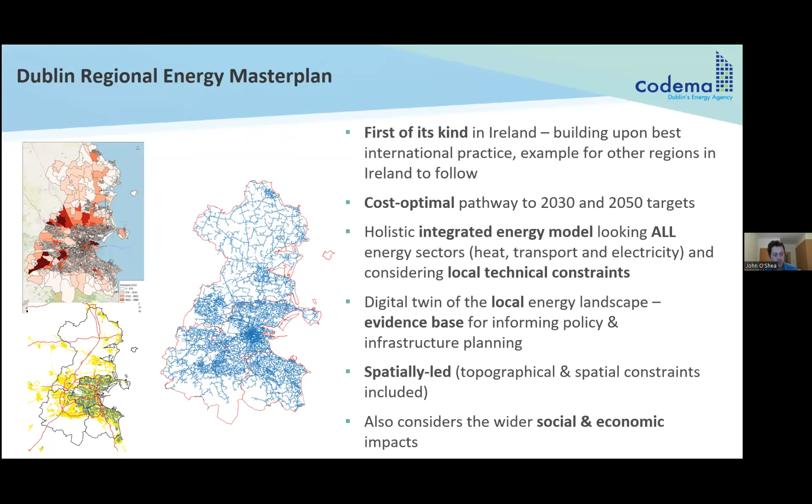And we also consider the wider social and economic impacts as well. So things like employment opportunities, health, fuel poverty, and affordability. So we've got a section on that as well in our work.

Just to chat about where it fits into policy at the national, regional, and local level. At the national level, this allows us to chart the greenhouse gas impact of the plan and assess how we might progress towards our plans, and also outlines the contributions that could be made by certain regions to national targets. So we've got national targets for number of heat pumps. We can say Dublin can contribute X number of heat pumps to that plan. Or for the national target for district heating, Dublin can contribute X terawatt hours to that plan.

And then at a regional level, it's a response to a number of regional policy objectives. So things like feasibility for district heating, identifying sustainable energy zones for large scale renewables. And then at the local level, as I said, it's used as an evidence base for things like our climate change action plans, informing county development plans, identifying decarbonisation zones, which the local authorities have to identify as part of their remit. It's also an online data source that can help support sustainable energy communities in their own more local master plans.

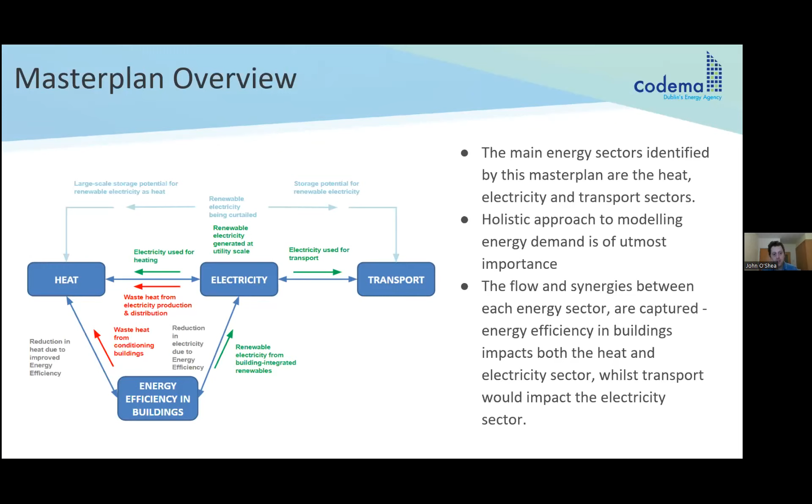And also things like, if you improve the energy efficiency of buildings, how does that impact the heat demand, or will it also create more opportunity for waste heat to be used through the cooling system. So it's trying to model all these different interactions.

So the process then, I won't go into a lot of detail on this, but just to give an overview. So the modeling process is basically, we started with a current situation, so what exists now, and then projected a business as usual case, which is basically taking the current situation and projecting it into the future, for things like increases in population, upcoming building standards, things like that. And then identifying the potentials based around the local constraints. So the local constraints for each technology, and then using that to inform our optimized pathway to achieve our targets.

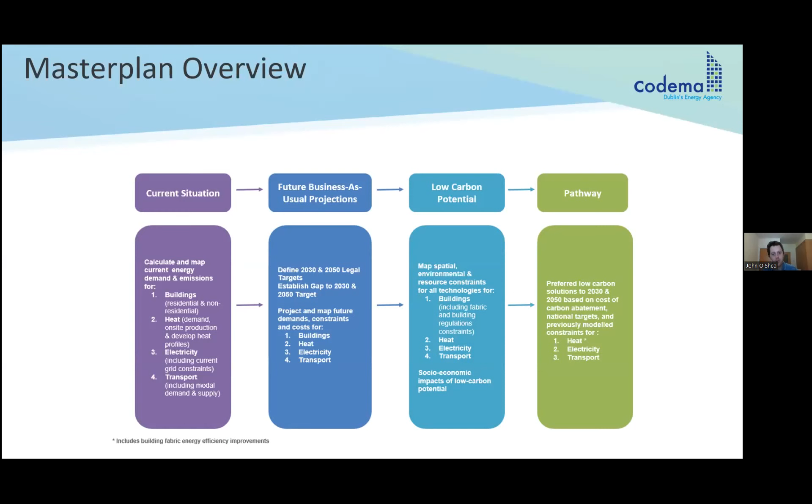I think it's important to say as well that one of the main motivations around how we address the master plan is that we didn't want it to be a report just gathering dust on a bookshelf. So we wanted it to be interactive and open for use and interrogation by others. So to do that, we prioritized the use of open source tools. So a lot of the work that we've done has been done in Python, where the code is available online on our GitHub repository, where other regions can use and avail of that resource.

We have a lot of online resources and maps, which the general public can look at and say, oh, my neighborhood seems to be suitable for this certain technology. So increasing engagement in that way, and then also making the data we have available for other research groups in academia, so that, like, we've done a lot of pre-processing of data in the master plan. So we've done all this work, so we want to make sure that others don't have to go through that same step, so they can start their research from the point of doing the research rather than the point of gathering data and cleaning data, which is always a significant amount of time for anyone who's worked in the area. They know that well.

And then also we're already starting to use the master plan to inform local policy. So that's our plan, that it will continue to be used by local authorities, etc., to help inform their local policies. I think it's worth mentioning as well that we collaborated with a lot of different organizations in putting this together. The 4 Dublin local authorities, we've got a residential energy modeling group that we're part of as well, that helped input into some of our models, engaged with ESB, the NTA and all these groups to help inform this. So it's trying to bring all those strands together into one path.

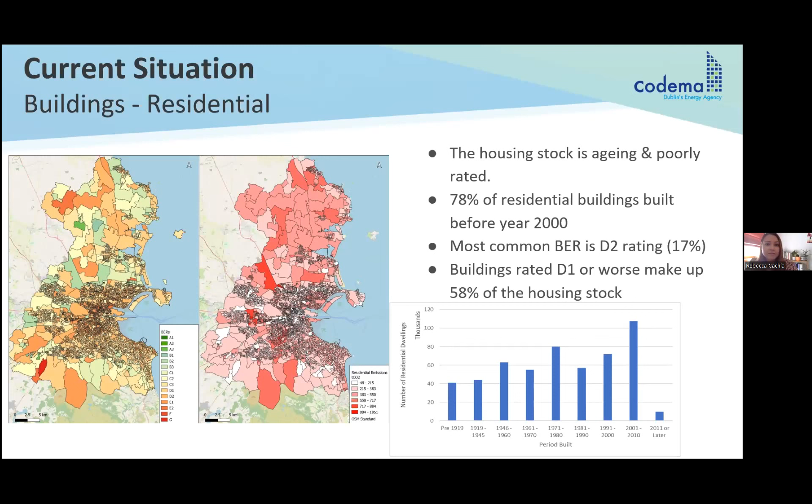Thanks, John. So the non-domestic sector includes commercial, so that's the likes of retail, offices, restaurants, all the public sector buildings and industrial buildings, excluding ETS buildings. In this project, we've analyzed over 30,000 commercial properties, and the total energy demand from non-domestic buildings is coming from commercial buildings and services. They make up 65% of the demand, followed by the public sector and industrial uses.

For the public sector, we've made use of metered energy consumption. This is all data that's coming from the monitoring and reporting through the SEAI's tool. From this, we could find that healthcare buildings emitted the most CO2, followed by education buildings, offices and other buildings. For commercial buildings, we made use of benchmarks, so that's really using an energy use per meter squared floor area.

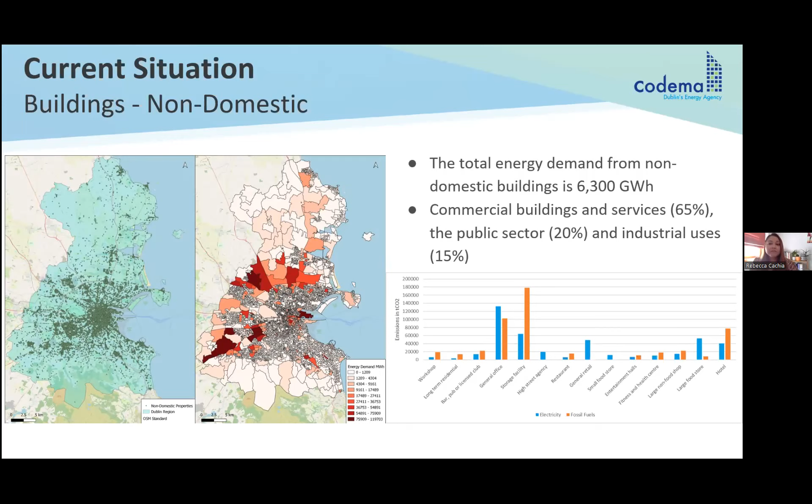And it was found that storage facilities were emitting the most emissions, so that's the likes of warehouses and bulk stores used for retail, offices, and leisure categories. And then for industrial emissions, we made use of industrial annual emission reports from the EPA. This provides us with metered energy demand for large scale energy buildings. Next slide there, John.

Thanks, Rebecca. So the current situation in heat: the total heat demand in Dublin is just over 10 terawatt hours. On the right-hand side there, we've provided a breakdown of where that heat's coming from. It's predominantly natural gas, followed by electricity, mainly direct electricity rather than heat pumps, and then oil coming in third. And you can see with the electricity that predominantly that's in the Dublin city area.

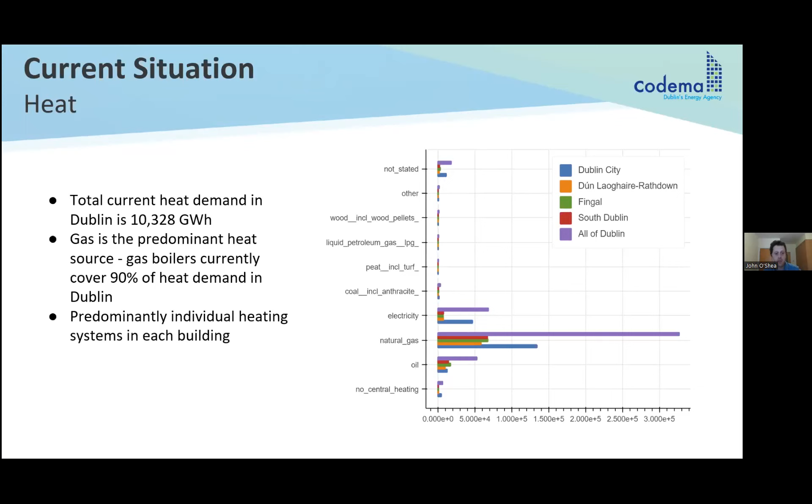That's due to the fact that there's a lot of apartment blocks that would have direct electric heating as opposed to homes. So gas is the predominant source for heating in the Dublin area, and it covers about 70% of the installations, but about 90% of the heat demand. It's worth saying that the heating systems in Dublin are predominantly individual heating systems that heat each individual building.

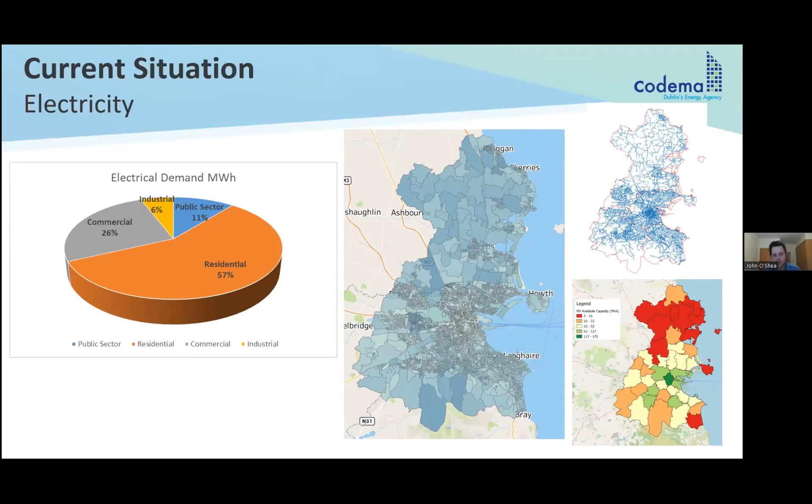Just on the electricity side, you can see the breakdown of electricity demand. It's predominantly in the residential sector with 57%, then commercial, followed by public sector and industrial. On the maps on the right-hand side, we've mapped out essentially the electricity grid for Dublin, and put together, down the bottom right, this capacity map, which shows constraints on the electricity grid, and we go into what that's used for in later slides. Over to you.

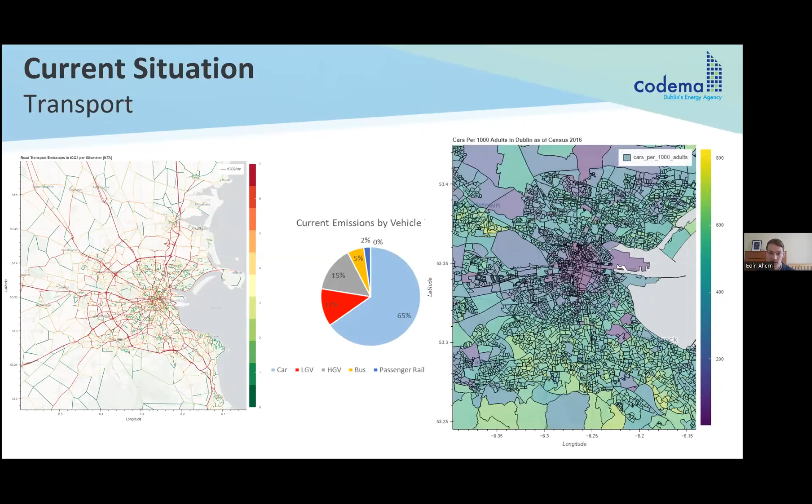Then looking at transport, the emission share for the Dublin region is slightly lower than the national share. And this can be due to the high density of developments, meaning that in the Dublin region there are shorter distances to be traveled, as well as access to higher quality public transport, walking and cycling facilities when comparing to the rest of Ireland, that is.

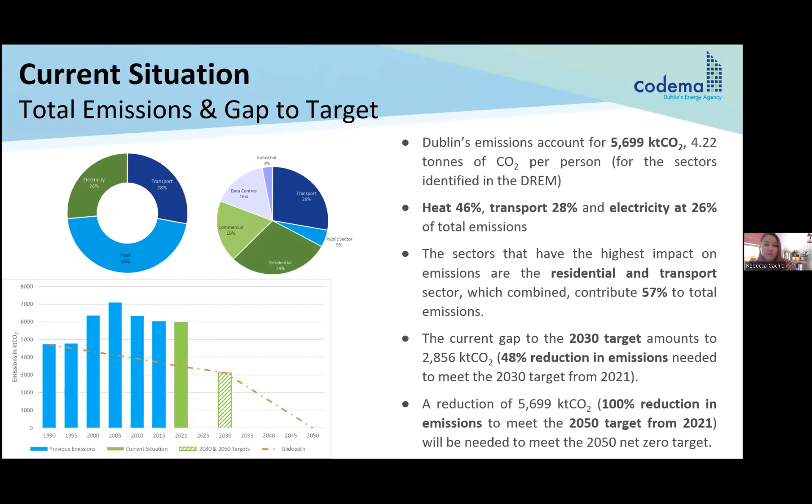So then moving on to our challenges and barriers and getting a sense of what the key issues are to meeting the Dublin region's targets in 2030 and 2050. So for the building sector, the barriers to building upgrades can be attributed to a number of different issues, and most of these barriers are common to both residential and non-domestic buildings. So from Codema's Zero Together survey, participants highlighted barriers such as cost, poor infrastructure, and also lack of information and awareness as being key barriers to those living in Dublin to take direct action.

We've also taken into account in the master plan consumer behavior and consumption practices. So looking at cost and long payback periods for retrofits, it makes it difficult for customers to buy in essentially into upgrading their buildings. And this is even more so when you take into consideration consumer behaviors and consumption practices.

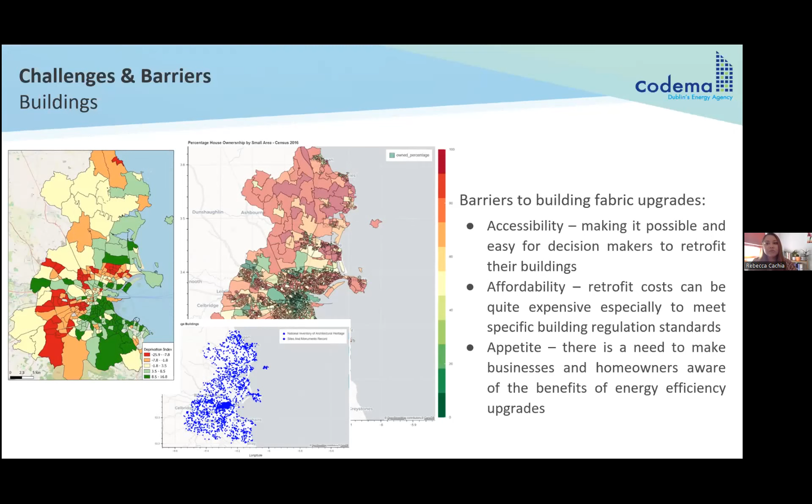Next slide there, John, please.

So one of the key questions was where to start, which areas to tackle first, and how to alleviate the issue of energy poverty in specific areas. So to assess energy poverty and to identify these areas that are in need of retrofit upgrades, we've combined together BERs. So we've looked at BERs with a rating of D1 or worse. We've combined that with high unemployment, so unemployment of greater than 20%, and a deprivation index of less than -10. So that would mean it's a disadvantaged area.

And from this, we can identify the energy poor areas. So it's identifying these areas which we should tackle first, which we should prioritize for incentives. And we have this tool online as well on our master plan website. So we'll share all the links then at the end of the slides.

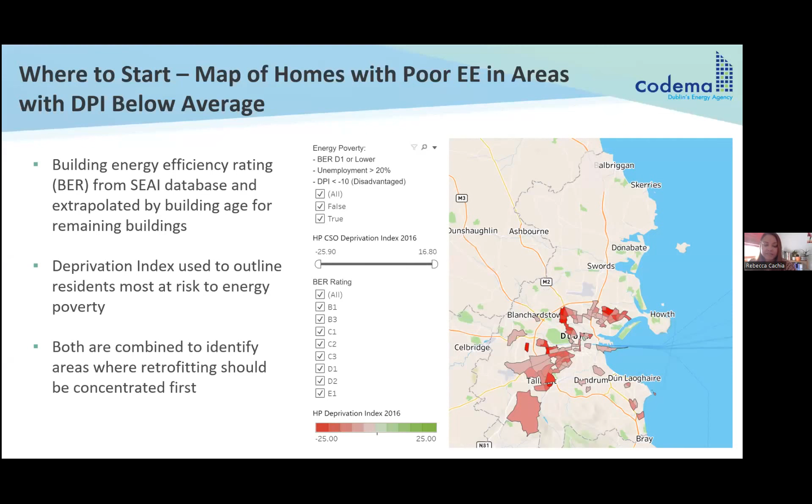Next slide there, John, please.

Thanks, Rebecca. Yeah, just to chat about the challenges and barriers on the heat sector then. So some of the main barriers to decarbonising heat, which is currently the worst performing sector in Ireland, are the high capital cost, and also the cheap cost of gas. Well, it's not cheap anymore, but relative to electricity, it's cheap. Also, the suitability of buildings to adopting heat pumps.

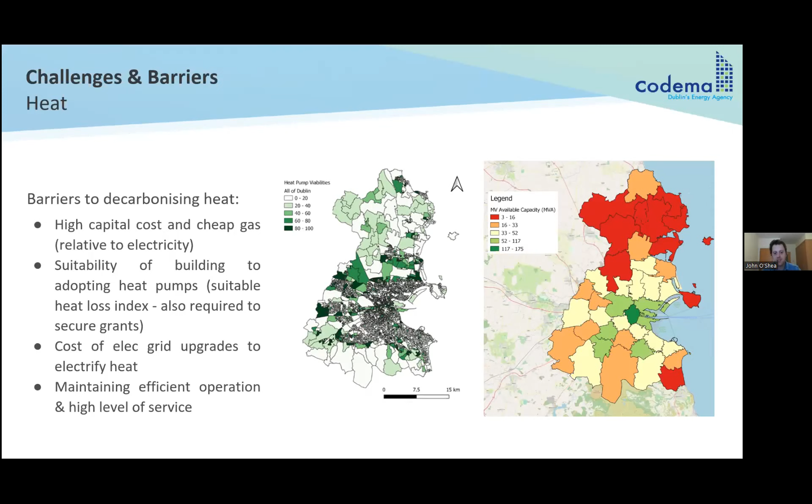On the electricity side then, the main barriers are achieving the scale of the generation that we require. So we've outlined the potential in terms of the different generation typologies, so wind, solar, utility scale solar, building integrated solar, and where they could feed into the network. And then one of the key barriers is the supporting infrastructure to allow that renewable electricity to be absorbed into the grid and transferred to homes and businesses where it'll be used.

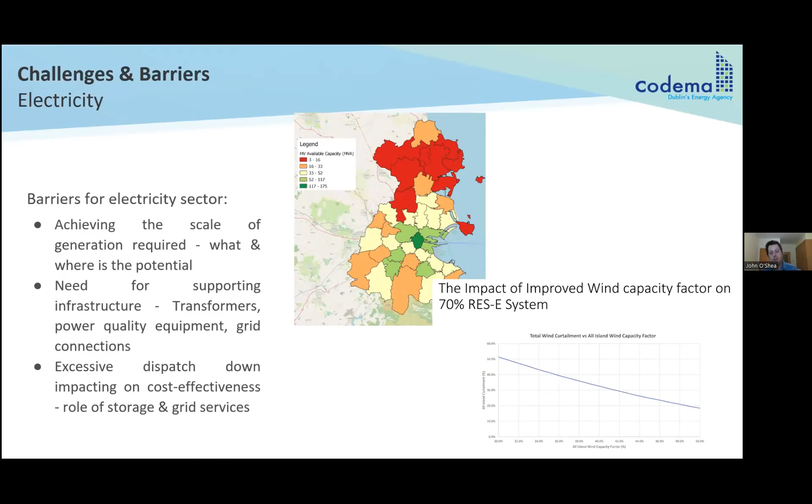So essentially the need for all those extra transformers, power quality equipment, grid connections, and then also the importance of avoiding excessive dispatch down. Dispatch down is essentially where things like wind turbines could be generating electricity, but they aren't because there's either not enough demand or there's constraints on the network. So there's a big role here for storage to balance the grid and provide grid services to allow us to push our targets towards higher renewable penetrations.

Also avoiding any environmentally sensitive areas like special areas of conservation. Looking for open spaces with minimal shading, where you've no shading on your PV arrays that would reduce efficiency or output. And also we did a digital elevation model of the topography of Dublin, and basically avoided areas that had a northern slope of greater than 10 degrees.

So we did a small bit of analysis to see what that impact would have. If you were to install your PV farm essentially in an area that had a northern slope greater than 10 degrees, then you're looking at least twice the land area to develop your PV farm.

And then we also avoided areas that were close to woodland, rail and roads, to avoid things like leaves and dust that can land on your array and cause efficiency issues. And then we also tried to prioritize areas where the land value was low, so looking at areas like landfill sites, cutaway bogs - kind of taking that low value land and trying to use it for PV farms.

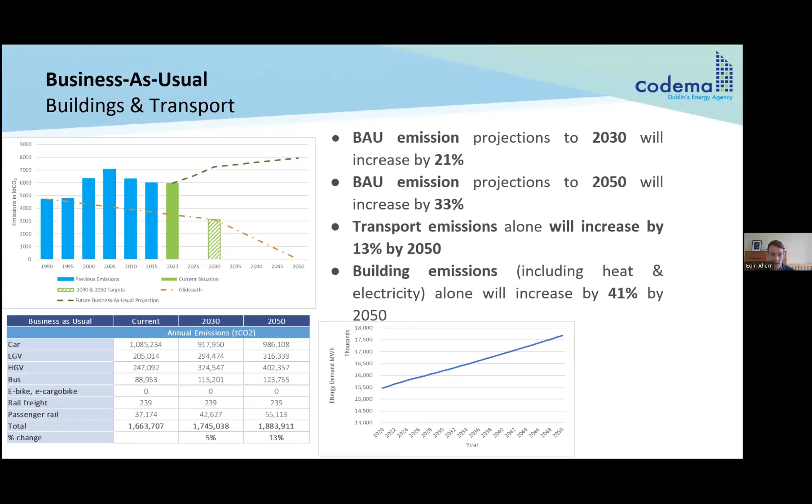So when we're trying to come up with our pathways for 2030 and 2050, we were looking at what targets we need to be setting. For 2030, we're looking at a 51% reduction in emissions, and by 2050, trying to get to net zero.

To achieve that for 2030, we'd need 213,000 EVs on the roads in Dublin, as per the scaling down of national policy. But on top of that, we'd also need to reduce the distance traveled by fossil fuel vehicles by about 23% at a minimum.

As part of this, we were looking at what other measures might help us along the way - increasing public transport, so the level of service of buses was increased by 25% over what the NTA had in their own original models.

The NTA have done an awful lot of analysis on the Dublin region, and included in their models everything that was in. We basically had a model output from the previous Greater Dublin Area Transport Strategy for 2016 to 2035. So we had done this analysis before the new draft strategy was published in November - bear in mind some of these figures might vary slightly with what's proposed now with the new strategy.

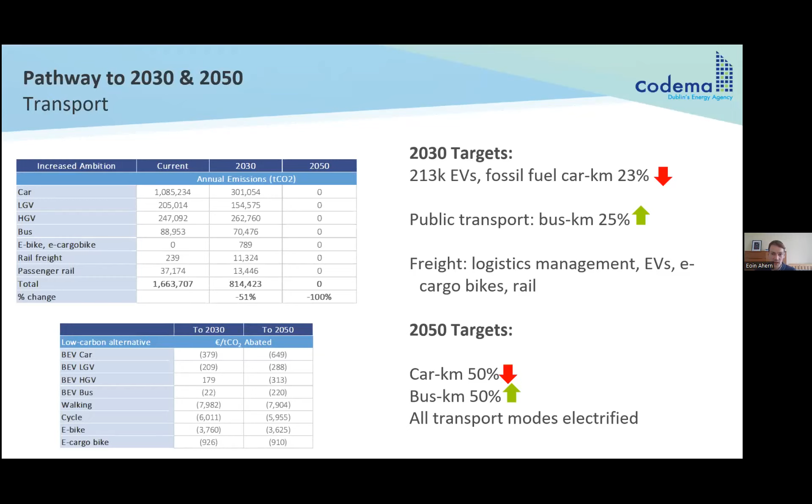Also, all transport was assumed to be electrified by then. Government policy states that there will be no new fossil fuel vehicles sold in the country past 2030 - this is in the Climate Action Plan 2021 - and no NCT certificates for fossil fuel cars past 2045. So the assumption here is that essentially everything will be electric by 2050, which may not be exactly the case, but it's what we were modeling.

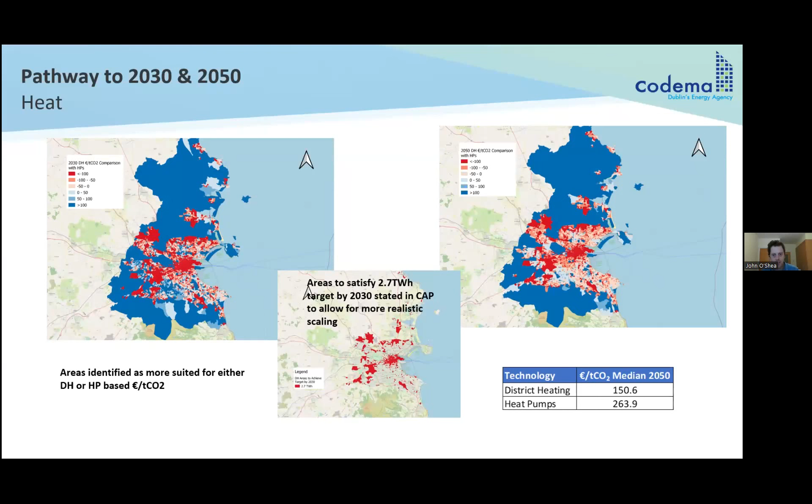On the heat source side, as I said, district heating is an enabling infrastructure. It allows you to use waste heat from data centers, power stations, and rivers, using heat pumps to increase the temperature for district heating networks from these sources. We've identified about 520 sources in Dublin, with total available heat of about 3,500 megawatts, enough to heat roughly 1.6 million homes, far in excess of the number of homes in Dublin.

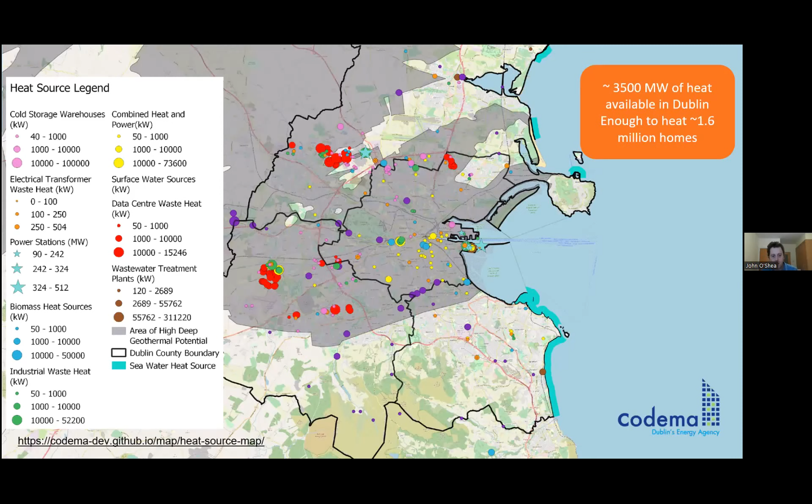This gives an outline of the heat source opportunities, and there's a link at the bottom left to an online version of this map, which we've also posted.

To give a breakdown, this is our 2021 breakdown, and we've also done it for 2030 and 2050. Currently one of the main sources of heat is power stations, but that drops off significantly by 2030. In that period, the data center slice gets bigger, with new things introduced like curtailed electricity from offshore wind. So even though power stations drop off significantly, the total heat source availability doesn't drop off that much in reality across the lifetime of the plan.

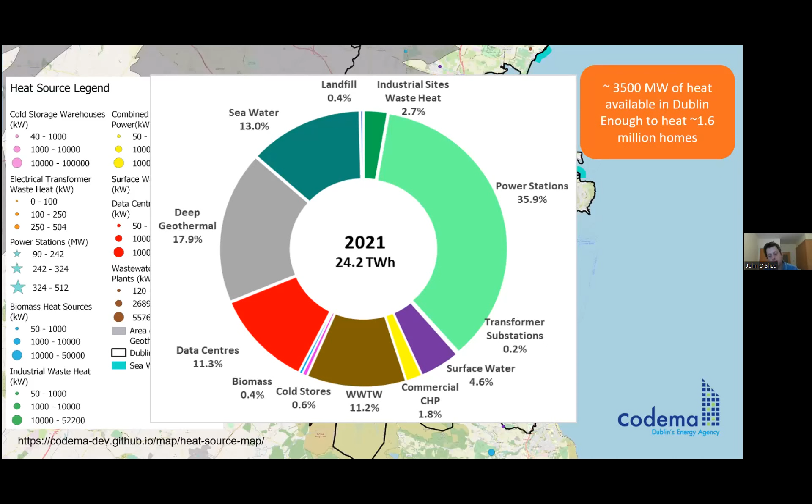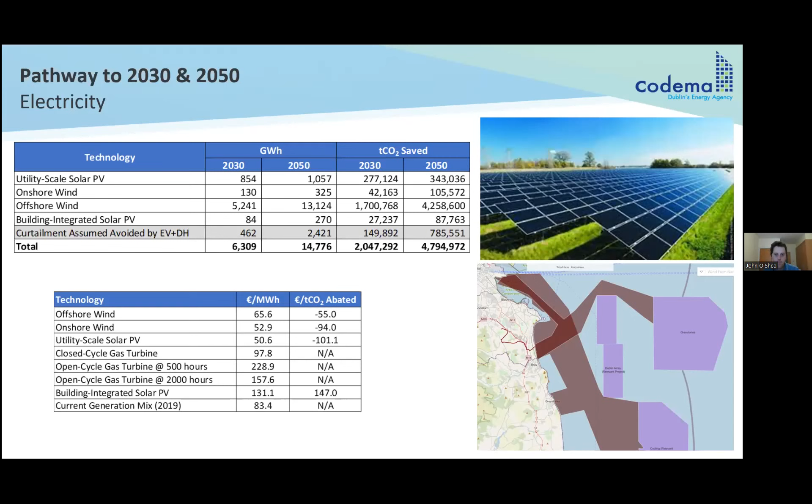It's the amount of wind that would not have been used were EVs and district heating not already installed, so basically how much energy they're absorbing and making use of at different times of the day when the wind is blowing.

Thanks, John. Throughout this master plan process, the team has been considering wider economic and social benefits of the low carbon net zero pathway.

So by making use of low carbon technologies and increasing renewable energy, this can provide multiple opportunities. So, for example, using indigenous sustainable sources to meet Dublin's energy needs. This way, the region can reduce its reliance on fossil fuel imports, which is very much needed at the moment. And also by making use of low carbon local solutions to reduce emissions, the region can improve its air quality and can also help to generate more employment for Dublin's citizens.

So this employment generation in the low carbon clean energy industry would mean that a number of citizens would need to be upskilled for new roles. And by ensuring that citizens are actually upskilled in the area of energy generation and low carbon technologies, then this means that we can ensure that there's a more just transition for the Dublin region's citizens.

And next slide there, please, John. So in the next slides, we'll be seeing the pathway to net zero emissions that's proposed by this master plan. So the master plan will seek to remove from our atmosphere a total of 8,240 kilotons of CO2 by 2050, which can greatly improve air quality and reduce air pollution as well.

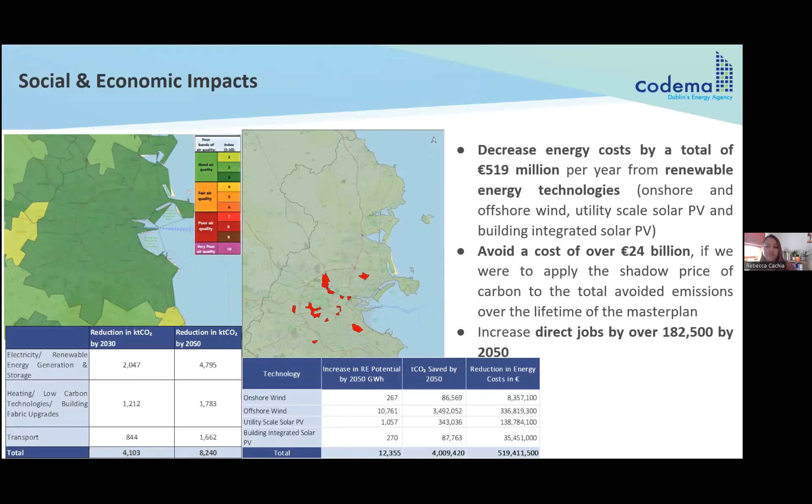And by investing in clean energy projects, besides helping improve air quality, increasing renewable energy generation, reducing emissions, we can also help improve the economic status of the region. And this would be through the generation of local jobs to facilitate, I suppose, this emission reduction that's needed. And from this master plan to 2050, it was found that direct jobs would likely increase by over 182,500 by 2050. Next slide there, John, please.

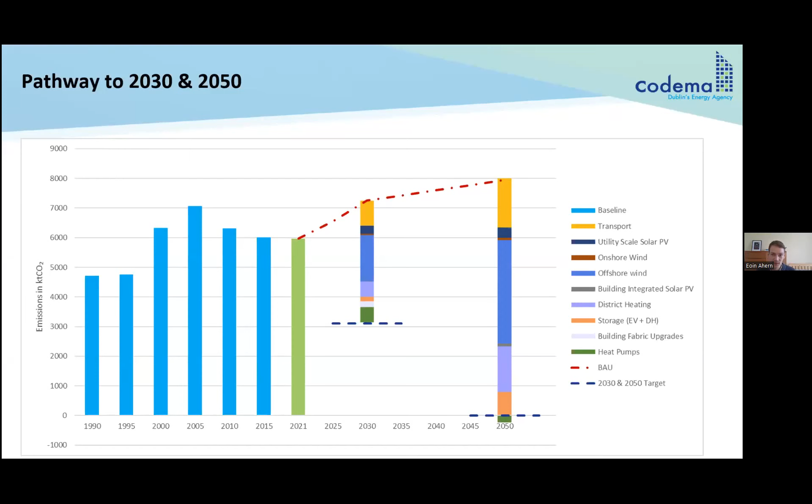So kind of putting some numbers on just what was in the previous chart there. So if we carry out all of the recommended actions, we could reduce emissions by 4,100 kilotons of CO2 by 2030, and double that by 2050. The amount of electricity that could be generated through renewables in Dublin could be almost 15,000 gigawatt hours by 2050.

So I suppose through all these actions, it shows that it is possible to meet our 2030 and even exceed our 2050 target. It'll be very difficult, but it is technically possible. And yeah, we would become a net exporter of energy by 2050.

And I suppose then, looking at the energy costs from bringing all this renewable energy technology into the county, whether that's wind, solar PV, or whatever it is, that could save or reduce our energy costs by about 500 million per year.

And then on an overall societal level, looking at the avoided costs, so this is avoided societal costs of over 24 billion when you apply the shadow price of carbon. So that's external costs in health and well-being and jobs, everything else like that. That's not just energy costs.

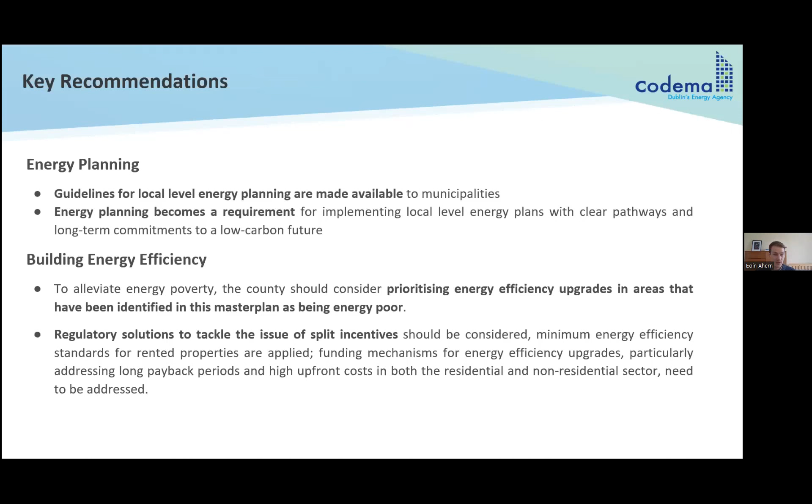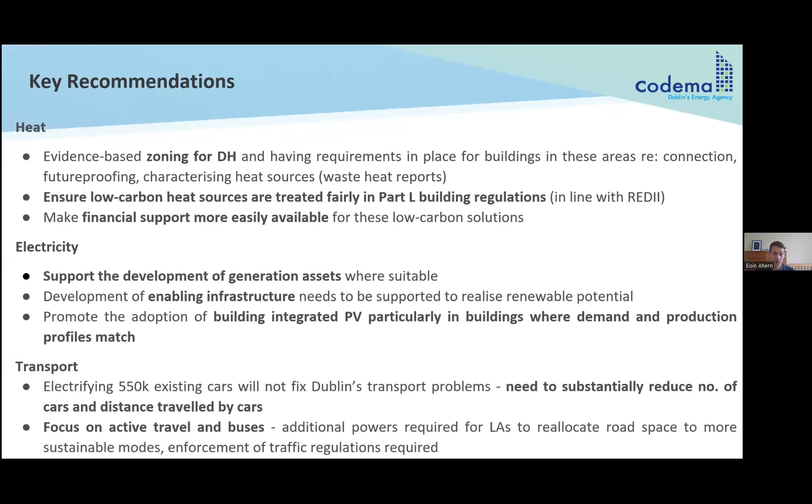So, from Codema's perspective on how we'd like to see the master plan, this work develop and be brought forward. Essentially we've set out these spatially led pathways to 2030 and 2050, and the next step is the Zero Together project, which was mentioned earlier, which will bring as broad and diverse a group of stakeholders together to try and plot out how we will actually achieve what needs to be done. And then hopefully that'll lead to implementation of these projects at scale.

Next slide, please, John. So essentially the Zero Together project is a project Codema has been working on. It's a European project with a number of other partner cities doing similar projects across Europe. And it's looking at basically removing fossil fuels from our society by 2030 or 2050.

Next slide, please, John. So essentially what we're trying to do with this project is the Dublin Regional Energy Master Plan serves as the evidence base, and we collaborate with people from a variety of different sectors, and formed a transition team with front runners from various different sectors and areas of society. And we're trying to bring it together now. The next step would be to have really strong public participation in this process. We've already had a public survey earlier this year, and now to build on that and actually hold a citizens jury for Dublin is the next step.